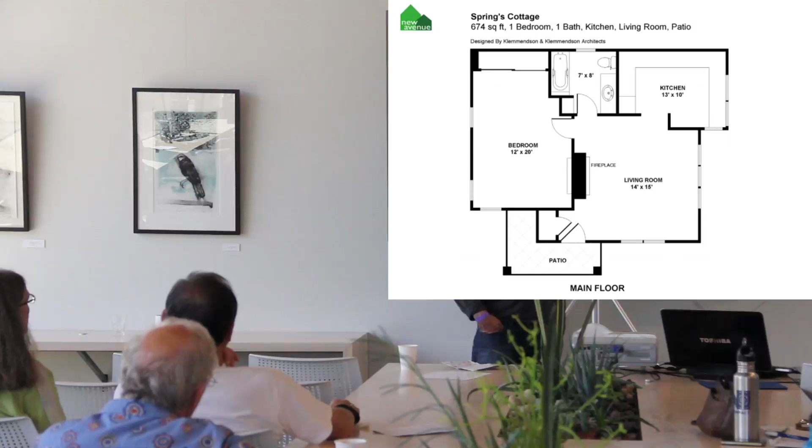Example floor plan, this is pretty nice. It's a huge 12 by 20-foot bedroom, relative to our world, with a two-sided glass fireplace you see through, and a view across the valley into Orinda Valley from the living room, the kitchen, and even the bedroom. It's a very nice place with wood floors, the view out that window, and lots of Spanish tile in a big kitchen.

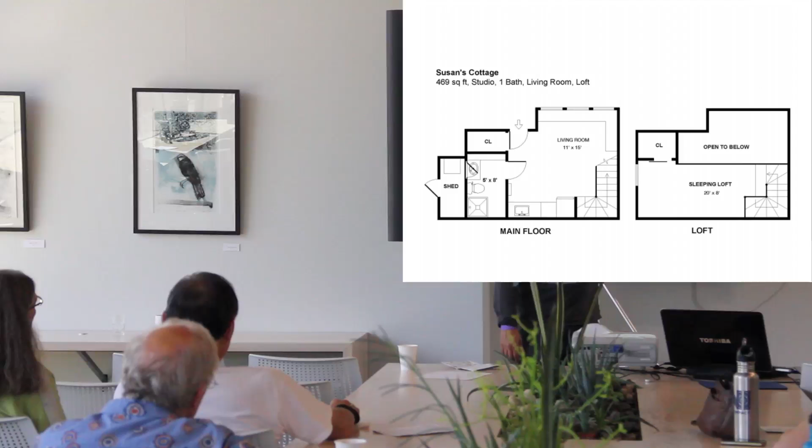I know there was a design session earlier. One thing I've learned is if you can get the peak to be at least 6 feet or 6'5", it's a game changer. If it's 5'5", it's not habitable. Yeah, I get nods of agreement. That little bit of difference is 100% worth it. One of the houses on the tour, which I loved, I think the biggest one, the 2-story one, they dug down a few feet. It's totally worth it, even if it costs you 10,000 bucks.

It's literally like doubling the size of your space. So the goal for today, that was all just a lead-in, is I'm going to talk through what we figured out, more or less the hard way.

My background was actually economic development, anthropology and economics undergrad, no architecture, no construction. I did work construction a little bit, and then I tried unsuccessfully to design or contribute to the design of the first few projects. It's fun, it's alluring, it's hard not to, but it's not my job, so I don't get to play that role, the client gets to play that role when they're designing with an architect. What we're really good at is project management, and we've learned to break each project down into 5 phases, which anyone who works in architecture would know.

There's basically pre-design or ideation, and in the next several slides I'll walk through the types of software and tools people can find. Some things are very advanced, pencil and paper. But as you walk through this, pre-design and ideation is just figuring out what you want.

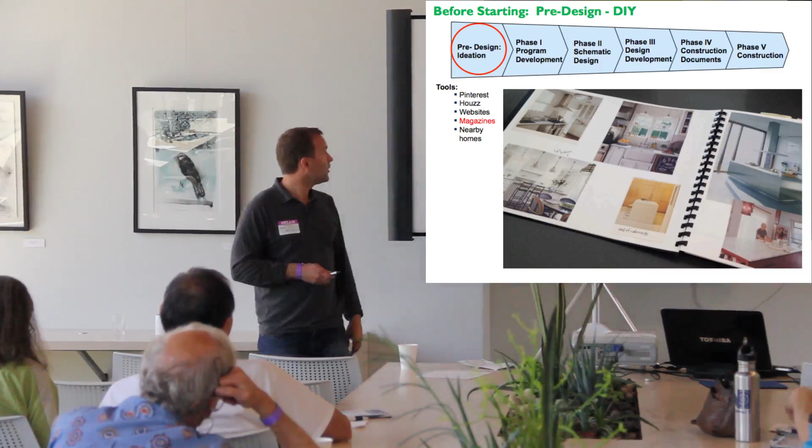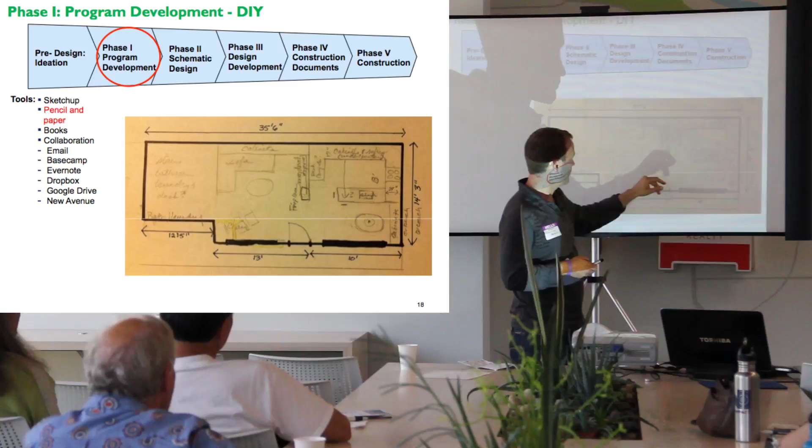And then over here it says stairs to the upstairs, bathroom, laundry, and desk. So that's her office, which is maybe 120 square feet. This is again a good exercise for a homeowner, and this is why you need architects too. This is her program - her kitchen is what matters to her, and this other stuff does not matter to her. So that's an example of beginning program development.

Another way - this was mentioned earlier if anyone was here - these books have been mentioned a bunch of times. What's great about the Not So Big House and In-Laws, Outlaws, and Granny Flats is that the latter has lots of pictures of great accessory dwellings. So that's just good for inspiration, and it's got a few recommended exercises.

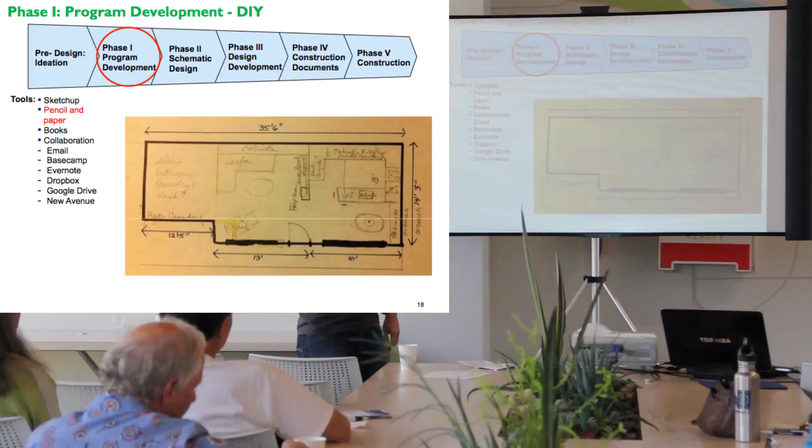What I love about the Not So Big House is there's checklists and exercises to go through, like what you want to do at different stages in your life and what you want to do in different rooms at different times. And that's all what informs the designer or the architect for what you want, or what you should get actually - you might not know what you want.

Again, what New Avenue does is we've taken a lot of these checklists and put them online. So people come in and start a project - those 1,800 people that have started projects - and they just start recording stuff like where I live, who it's for, how many people live here, are there kids on the way, and this goes on for 10 times what you see here. Are there any bad knees in the family, stuff like that.

These are all things that I view as almost a reminder, not necessarily something that has to be completed perfectly. But we've seen 2 projects go all the way through building permits where someone didn't ask if there was a health issue, and it turns out they're really bad knees. These 2 projects went all the way through building permits as 2-story structures with a staircase. Turns out it's for a father-in-law who has a really bad knee who can't get upstairs. So that was $20,000 down the drain because someone didn't think this through.

In defense of an architect, it's not impossible, but few homeowners are willing to pay you hourly to sit there and go through every possible scenario that might be an issue. So it's always try to do as good as you can in the amount of time the budget will afford. With a website it's beautiful, because we can throw up 1,000 questions and say spend all the time in the world on there.

I think last week we had 120 hours of our active clients going through this kind of stuff that they didn't have to pay for, that someone can just skim through, and in 30 seconds or 5 minutes of billable time they can catch a few things that might steer our projects away from being two-story ADA accessible buildings - because that's kind of what happened in those 2 scenarios.

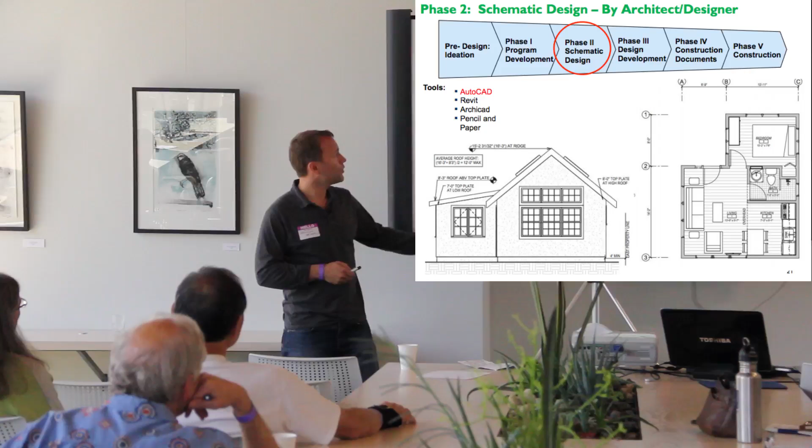That's what people use. If you want to talk about technology and design, almost every worksheet or spec list or finish list I've seen has been done in Excel. So we stick with that because it works.

What we've got on our 7 different versions is the stuff that we've seen purchased on the 20 projects that we've completed or spec'd on other bunches. People won't necessarily do everything, but it's a reminder—think about these things, don't forget it. Try to get that sink right so that you're not doing a big change order to move it around.

So that's what really design development is. It's appliances, materials, fixtures—things that, in Susan's example, a lot of stuff she did on her own at the end, but it's stuff that can really drive the price through the roof. It's the difference between a cheap rental with vinyl windows, fiberglass shower, and stained concrete floors you do yourself for $300, or a rain shower head that costs $800, tile that costs $6,000, and hardwood floors at $15 a square foot or whatever. So that's where this stuff all comes into play.

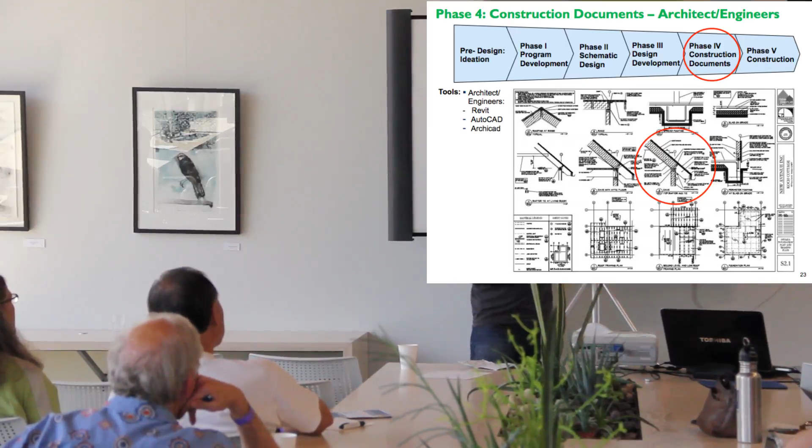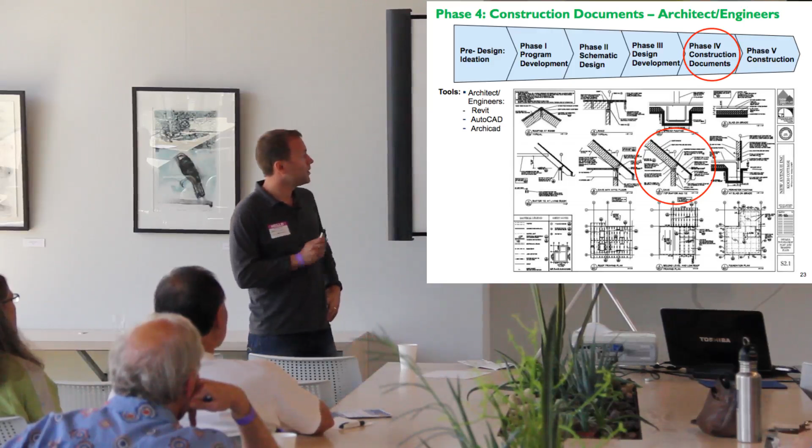A typical set of construction documents that we see has, just for an example, 10 different pages. And there's that one little detail on this one structural page. Where we're based in Berkeley, it's not that different from what I can tell, especially from Susan's cottage that I stayed in, which is in a historical district. You've got a couple pages of what's going on with zoning codes, waste diversion plans, all that stuff.

And then you get into, this is the waste diversion plan, then you get into the real—what I would consider architecture if I'd never been involved—the fun stuff, the size and the shape and the look. And then you get into all these little details that if I was a homeowner, I wouldn't want to know, like how thick is the rebar or whatever.

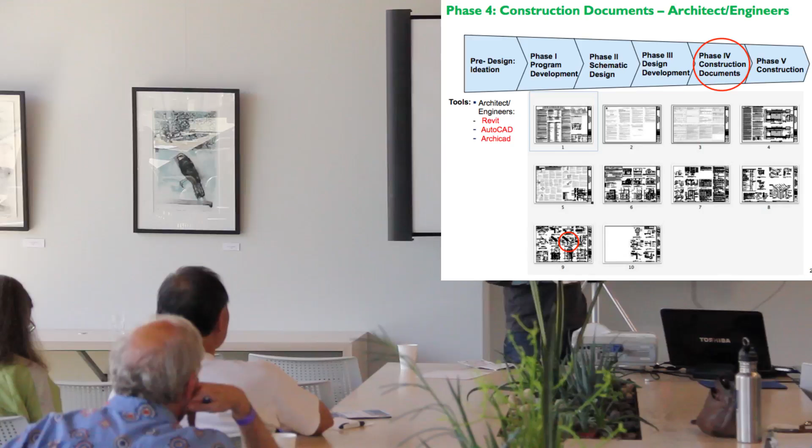So that's construction documents. And then during construction—my goal is really just to share what I know and have these documents all available for people to download. I don't want to keep going back to New Avenue's role, but all this stuff, our role here is just to collect a quote or proposal from an architect for how much money or time they expect it to take to get through these things.

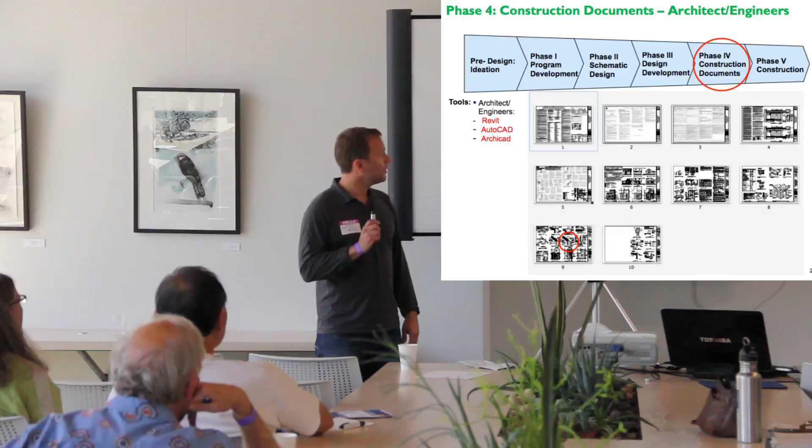The whole point of New Avenue is they just host these PDFs or whatever, get them saved on the site, and all the discussion is there. Later on, when the contractor gets involved—9 months later, 12 months later—when you're actually getting somewhere as the homeowner and it's time to bid it out and build it, you can go back and refresh what you obviously forgot, because usually this stuff gets buried in email.

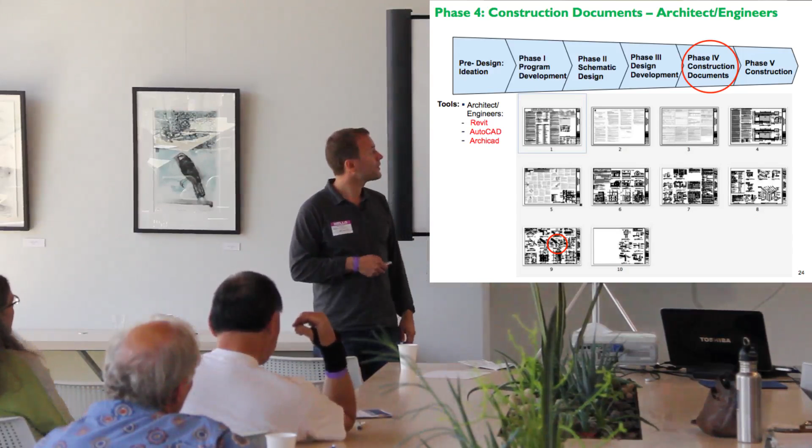But once all that stuff is collected and saved, we do get very involved in the bidding and construction phase. So what we've narrowed ourselves down to, via the projects we've completed, is about 175 row budget. This is just one section, the framing section. It's based on the CSI codes, which is an industry standard for construction, but there's actually 45,000 CSI codes, so it's not something you want to just look up and use as a homeowner. We took the top 175 that are relevant for our size project.

Within framing, it's rough carpentry, hardware and framing material, pickups, deliveries. At least as this contract, when we send this out, it's blank. The plans are completed, and then the contractor fills in what the budget would be for each line item, and they can choose how many they want to use.

So out of 175 line items, oftentimes only 30 or maybe 50 actually get a number. But the key is, when you're the homeowner and you don't see a number right there next to specialty or finished stairs and railings, you're not getting, I'll use Cole's house as an example, the staircase he has with the reclaimed iron and the circular staircase and all that.

But if you do have a number there for X thousands of dollars for something like that, then you know you're getting it. What we do is send it out blank, the contractor fills it in and says, this is my bid basically, and across the 175 rows, he or she will use 30 or 50. We did it in Excel quite a bit.

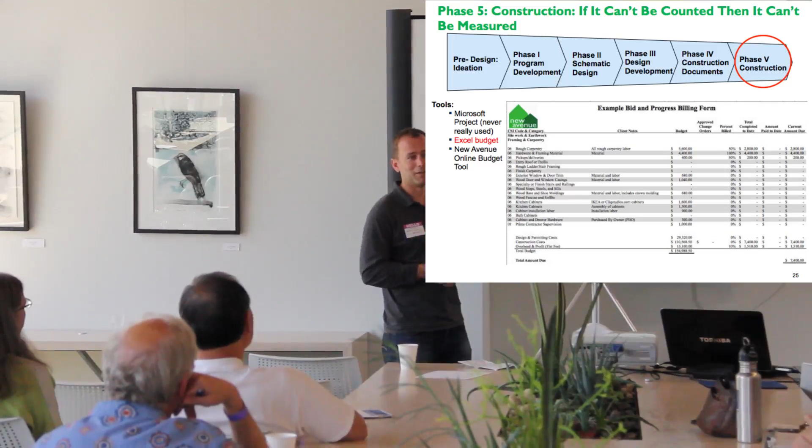The key, I should say, is that this budget is tied to a construction agreement, and we only pay, at least when we're involved, the way we manage projects, we do a bid and then it's a fixed price bid, and you only change the numbers via a change order, which is a good thing and a bad thing sometimes.

You never know, but oftentimes we get positive change orders and negative change orders. We probably get about 20 on an average project. And usually it gets completed, well, we're averaging within 3% of the bid price. So the key is good contract, good drawings, and a good budget, and then actually the ability to administer it properly.

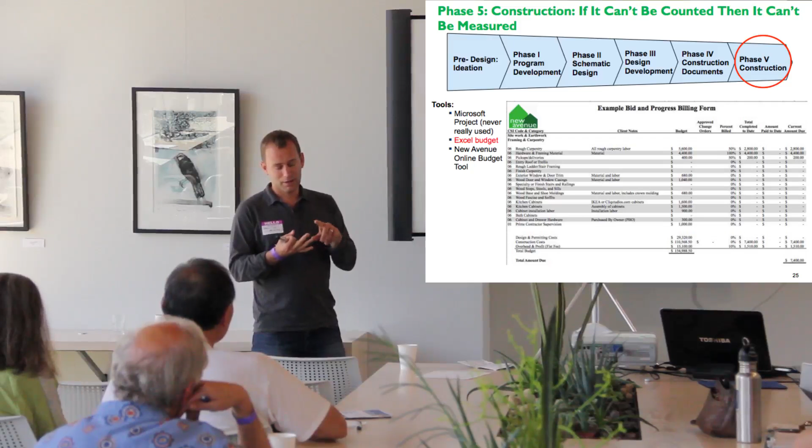I just ran into a guy on the tour today who said his brother started a project at a fixed price of, I think he said $350,000, and then the budget kind of got thrown out the door, and it turned into time and materials, and his brother ended up spending over $1 million. So that's a convenient story to come across today, but it's an anomaly.

But there's some range that people just, if you don't manage it well... I think it says somewhere on top of one of these, if you can't count it and you can't measure it and you don't have something you're working against, it's gonna go awry.

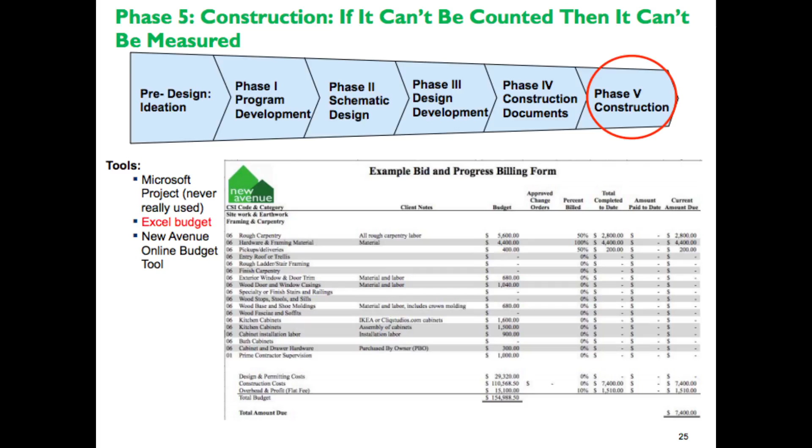So what we do is tie all three things together: the contract, the plans, and the budget. It all goes under one contract. Then as work gets done, for example in this project, the rough carpentry bid by the general contractor was $7,800. It was done a long time ago, so it's at 100%.

But if this was something in process, we might get something where, like, the hardware and framing material, which had a $6,900 budget, might be at 100% because it's on site. And the framing, rough carpentry, might be at, who knows, 25 to 50% because the walls are up and the roof's not, or the wall and roof are framed, but the plywood and interior stuff hasn't been done.

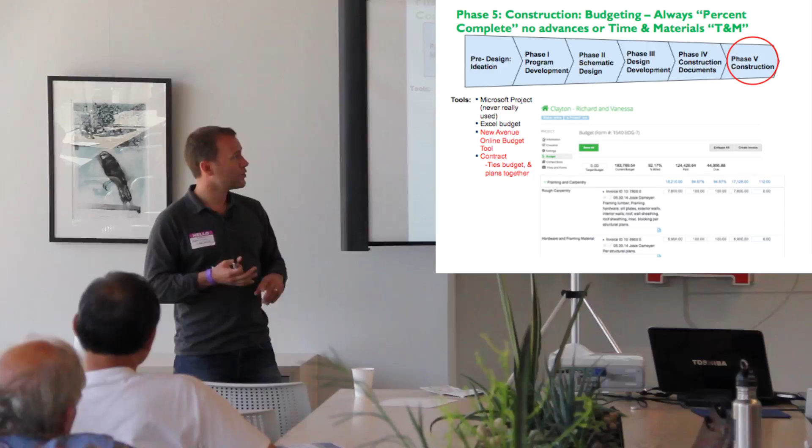So most of our projects, during the 6 months of construction, there's an invoice once a month. We go through, mark all the percentage numbers up to whatever they are, then collect the money from the client and pay the contractor. So altogether, this is more or less how we've learned to manage a project, and that's the gist of what we've learned for online project management.

So with that, if anyone's got any questions or thoughts, I know I'm the step between the end and happy hour.

When you say contractors bid, do you have contractors that you're collaborating with, or who are going to bid on this? We've found that it's kind of funny. The theory was if everyone gets online and collaborates fairly well, and you're not paying for someone to just kind of manage that, which a tenant rep or owner rep is usually an hourly type of job, or if you just inform people and let them collaborate online, then it'll make things more efficient.

So what we do, the other thought was if we get contractors comfortable using that system, they'll give fixed bids. The idea is they'll come back fairly often and we'll work with people that aren't technically part of our company, but we call them partners. So we do have contractors and architects that are partners.

We use them repeatedly, but it's open to anyone. A homeowner can go out and get bids. The reason I say that is it was a theory that we might actually come in better with us doing this stuff and architects and contractors working with us repeatedly. A couple years ago it was an idea, and then what's happened is we've seen lots of contractors we don't know submit bids, and we've historically, consistently come in below.

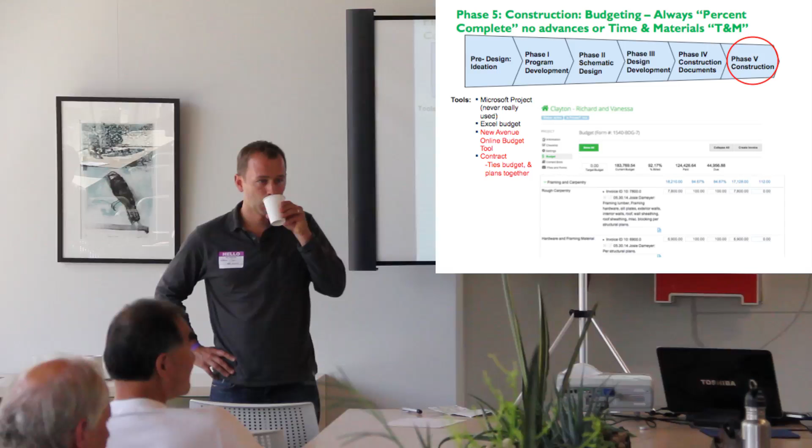Have you ever worked with folks who have a rehab loan, like a 203K loan? We've done a few like that, which is somewhat useful for us to be involved in, but when you get a 203K loan, the banks usually require this exact type of process. So the banks are going to refer somebody who technically does the absolute bare minimum. They're not going to have their own architect, they're not going to have their own contractor, and the company that administers the funds for the loan won't work with architects and contractors consistently. So it's kind of like you're on your own, and the bank only gives you your money when their inspector says work was done.

But technically what we legally do is the same type of process as those 203K disbursement companies. Yeah, you said you've been able to collect data about where the money gets spent in each phase of the process.

Is that—can you give a breakdown of percentages of where that money comes out? Sure, yeah, definitely. It's tough to say, but like, if the real number Susan told me was 110, and I wasn't involved in her project, and she really did another 25 worth of work—if it was like a $135,000 project, she would have spent probably about... ignoring the permit fees to the city, I could tell you I know cold what people do in, say, the Bay Area, and I think it's somewhat similar here, but it's probably $2,000 or $3,000 for program development and early work, which blurs.

It's not as clear as I like to present it, step by step. It's never that way—there's always a little bit of time that goes here, a little bit that goes there.

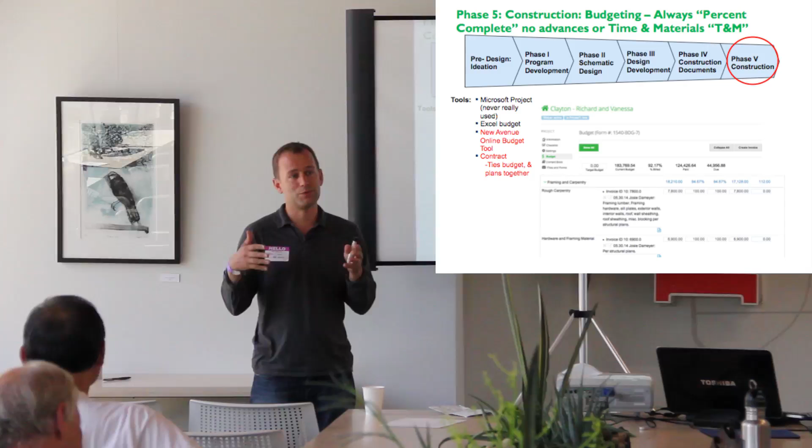But it's usually about $2,000 to $3,000 a month that people pay, on average over 8 months, between architecture, engineering, surveys, and permits. Then you're about $20,000 in before you start construction. You divide the cost of construction by 6 months, a little heavier on the beginning because foundations and framing are more expensive. If it was Susan's, at $130,000 construction cost, she'd probably spend $30,000 the first 2 months, then 15 to 20 thousand per month over the next 4 months.

We actually have some flyers, 8.5 by 11s—one of the guys I work with jokes we've got the most clinical marketing material in history. I've got a schedule showing when people have paid and a longer version of this. All the construction stuff was condensed, and everything before that is spelled out in that 8.5 by 11 sheet somewhere in the back. So you could grab that and take a look.

Do you have the tools available for free online? Yeah, that's this stuff. I didn't put in a sign-in sheet, but you could definitely go on the site and find this stuff and sign up, or we could collect emails and I'll email it out. Go to the site if you want—you sign up, start a project, and you should see most of this stuff. Or I'll pass this around—give me an email and I'll make sure you get an invite to see it all.

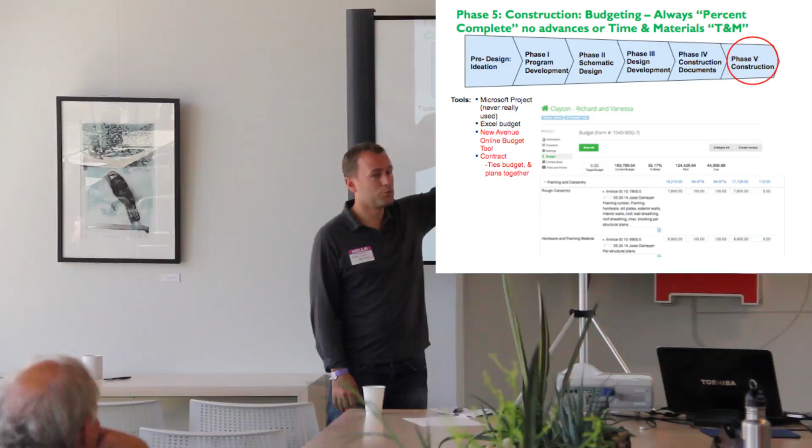Or the foundation will go down 4 feet with multiple layers of insulation, and the contractor will say, well, I just poured something exactly like that 2 blocks away that was only 18 inches down—why are you going 4 feet? And maybe that saves $1,000 or $2,000.

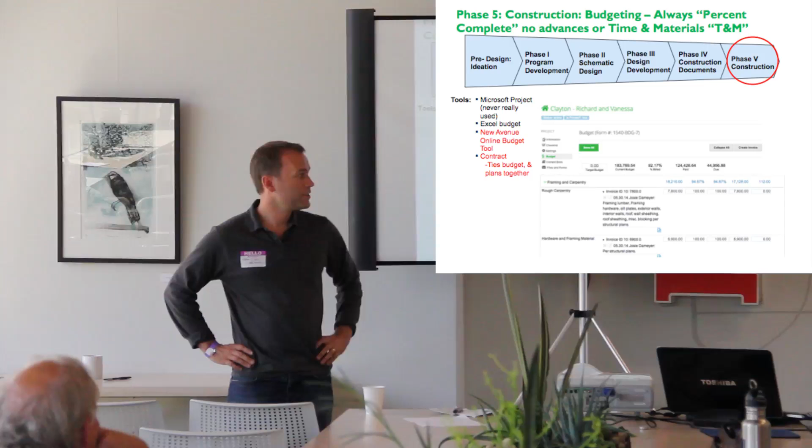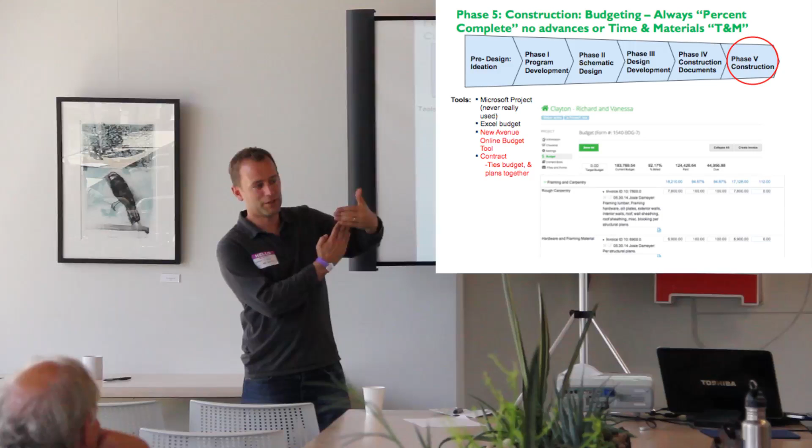But it's stuff that basically prevents the architect from having to redraw or issue a change order during construction—like when the framer's putting the walls up and drilling holes for venting in the roof, and the inspector comes by and says you can't have holes there.

So honestly, that's where we earn our keep more or less—minimizing those hassles. If you catch the upstairs for the guy with the bad knee, or catch the sink that's just random when the homeowner has a very particular concept for the bathroom, or catch the holes for the insulation—whatever it is, there are so many opportunities to go awry that if you catch just a couple of them, it makes life a lot better.